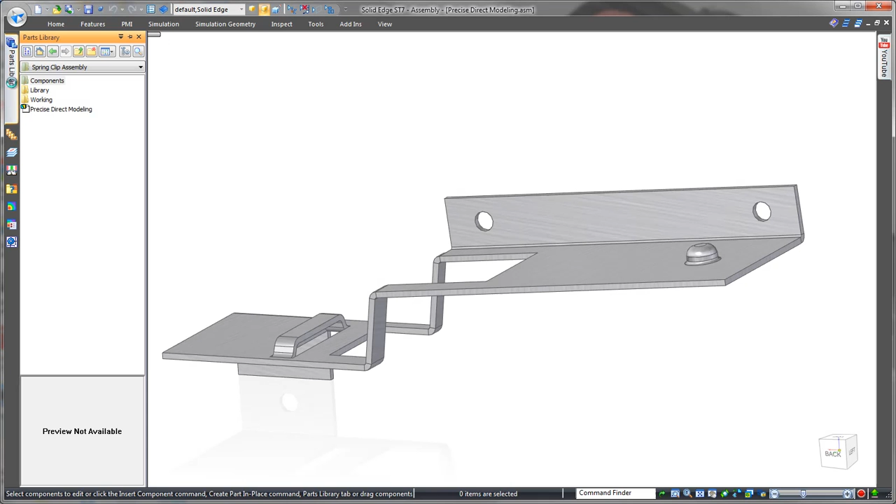Let's take a look at the precise parametric control on offer while we progress our spring clip concept. First, let's bring in our spring clip and assemble it with the parts it was intended for: the clip to the base, and the USB block it needs to hold.

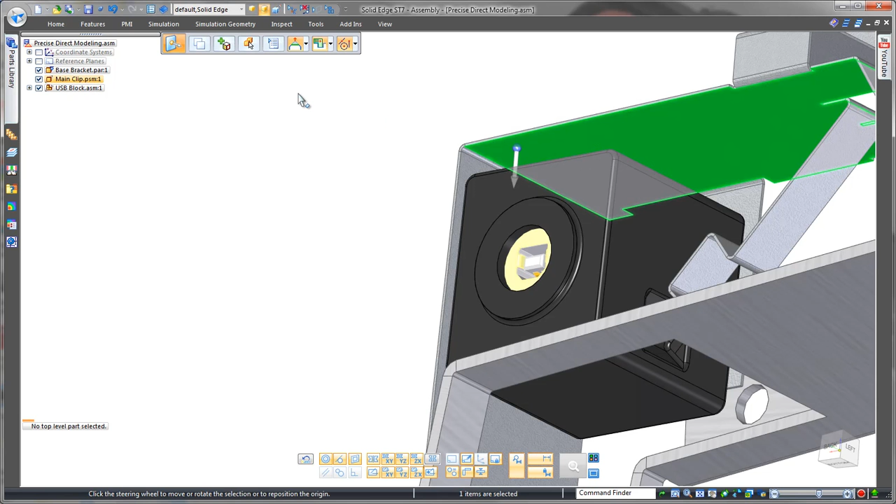The first precise change we need to make is to close up this gap between the top of the USB block and the spring clip. In most any other CAD system, you'd have to make this change at the 2D sketch level with sketch relations. In Solid Edge, we can simply relate faces in 3D instead.

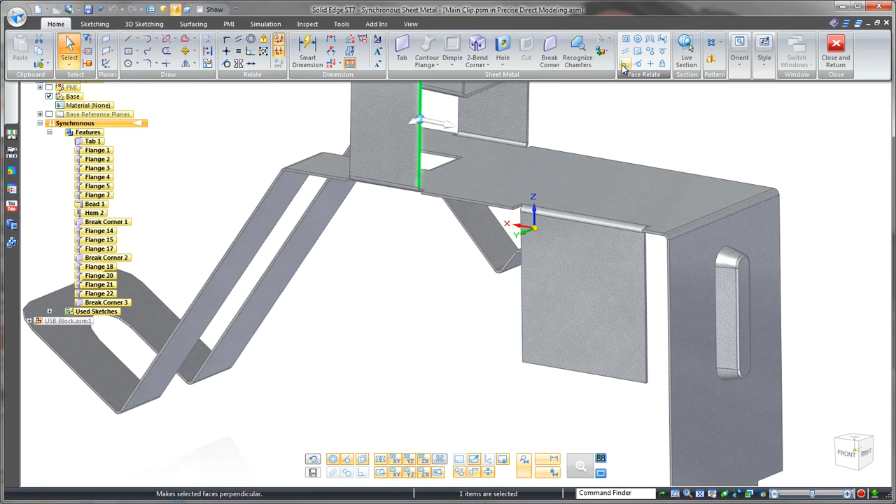Easy. Looking at the back, I notice the tabs on the top are not quite square with the top face. No problem, a couple more 3D relations will fix this. For the side faces of the tabs, making them perpendicular to the top, and for the top faces, making them perpendicular to the side. Notice how both tabs are being updated here. That's the intelligence of synchronous technology.

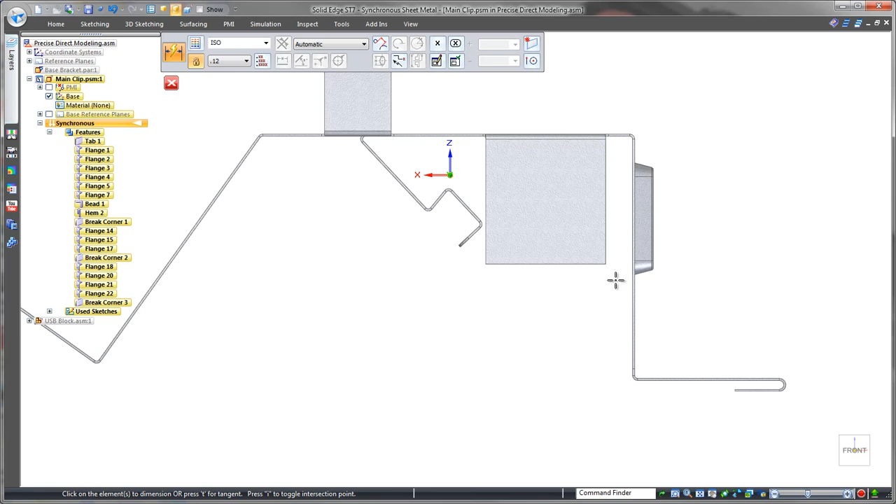Let's start detailing this model, and of course dimensions are key. Solid Edge has two main ways to dimension. The first is like most any other CAD system, in 2D when creating a sketch for a feature, but the second, which you see here, is unlike most any other CAD system, and much more intuitive. Just dimension the 3D model directly.

We can leave this floating so that we still have the flexibility for further changes, or lock it down to be precise. We'll lock this down and we'll add another one for the flange width.

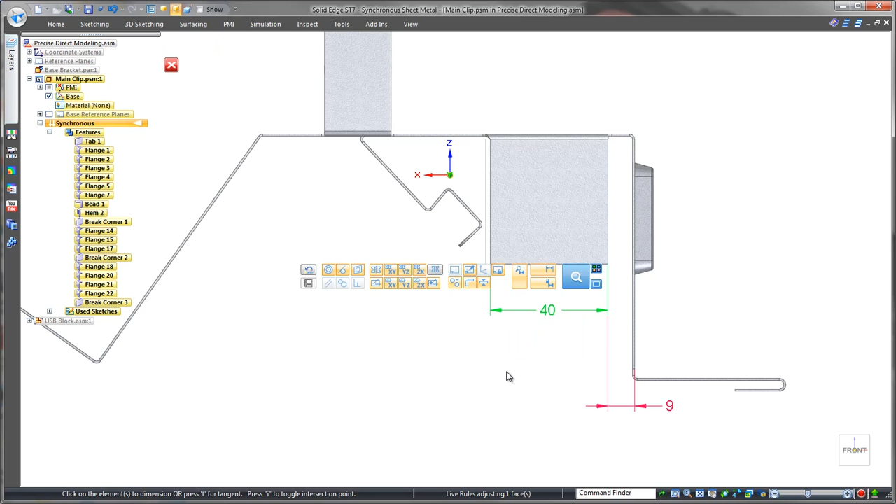We'll dimension these top tabs next, and look closely at the precise control that's provided. These green arrows allow us to control the direction of the change, which side moves and which side stays put, or even a symmetrical change if we wish.

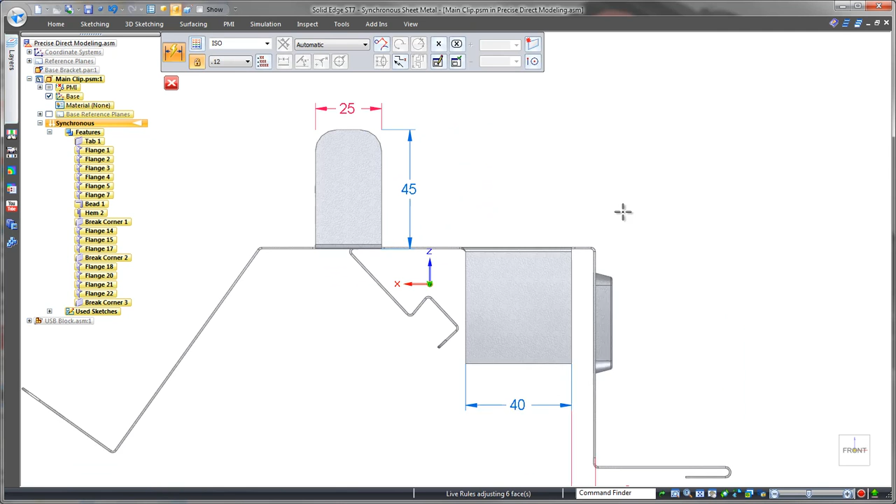We'll speed through adding the other required dimensions using the same technique, and for your information, the red dimensions are the ones we've locked down, and the blue ones are the ones we've left floating. Overall, notice how easy they are for someone else to understand. Great for reviews. Oh, and of course, we're not just talking linear dimensions, let's detail the angle here too.

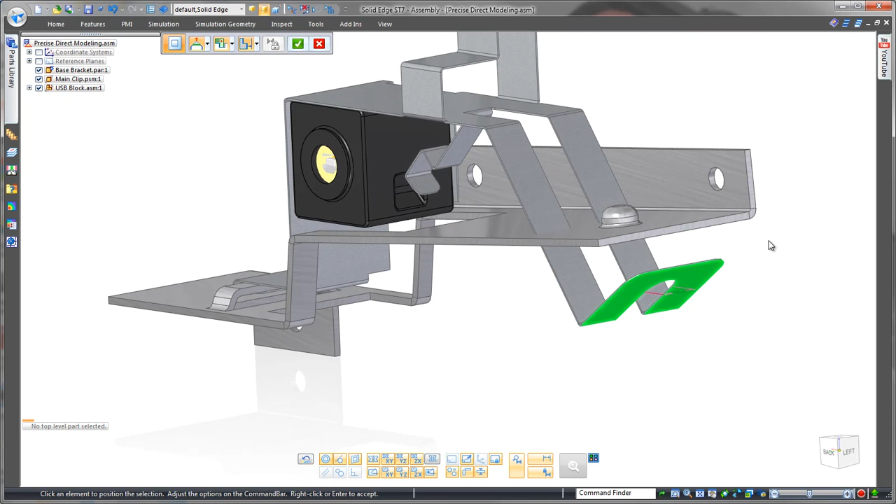We should finish working on the other end of the clip. Another 3D relation will do the trick to move and match the angle of this piece. And we can use what's called the steering wheel to drive a synchronous drag and snap into place here. And let's make sure that the whole thing is assembled centrally.

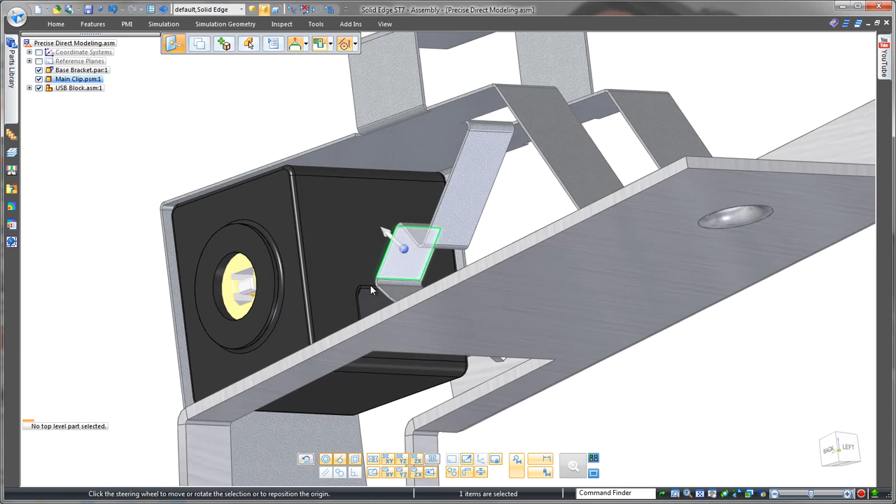Next up is the retaining clip that needs to slot inside the groove of the USB block. Once again, an easy face relation, or steering wheel, drag and snap can be used. Whatever's easier.

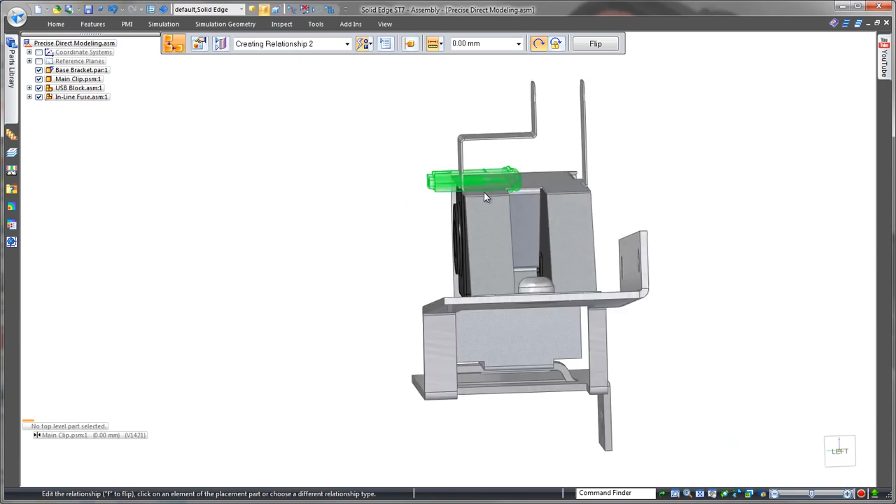Perfect. One last subassembly to bring in, an inline fuse. The purpose of the top tabs are to support this, so we need to make sure it'll fit tightly into place. So let's make some more precise direct edits.

Now I know the wire diameter is less than 3mm, so what we can do is drag the steering wheel to create a 3mm offset before dragging and snapping the tab itself. This leaves us with a 3mm gap, precisely how we want it. Let's drag this section in too, up against the fuse.

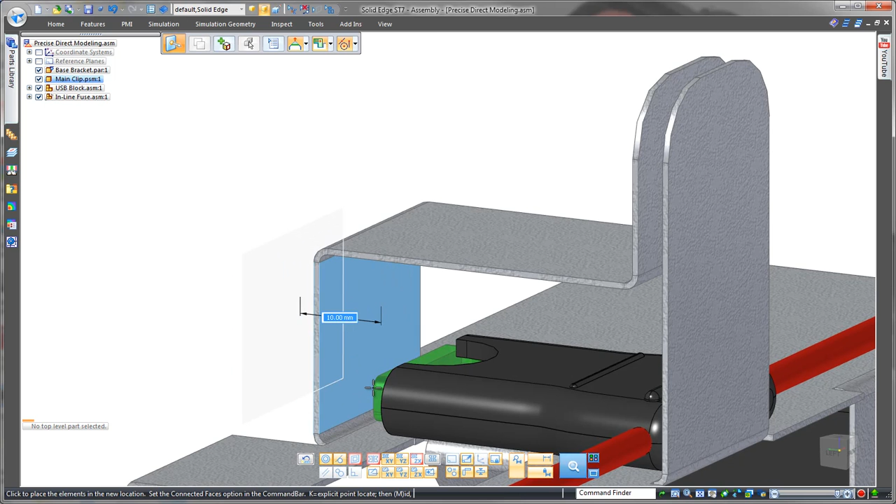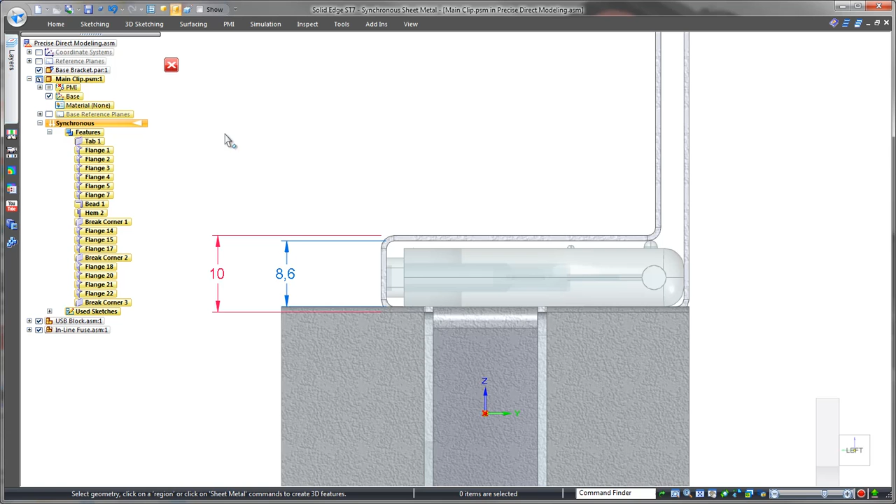Something worth noting is that for sheet metal dimensional control, we can design to either the outside or inside. It doesn't matter which dimension we change, be it inside or outside. Solid Edge will always take into consideration the material thickness.

Design complete, and of course it doesn't stop there. We can take this same all-in-one concept to final model into a manufacturing drawing. First of all, let's create a custom view of the assembly so that all aspects of the part can be seen. Let's have that shaded, and a few views of just the clip.

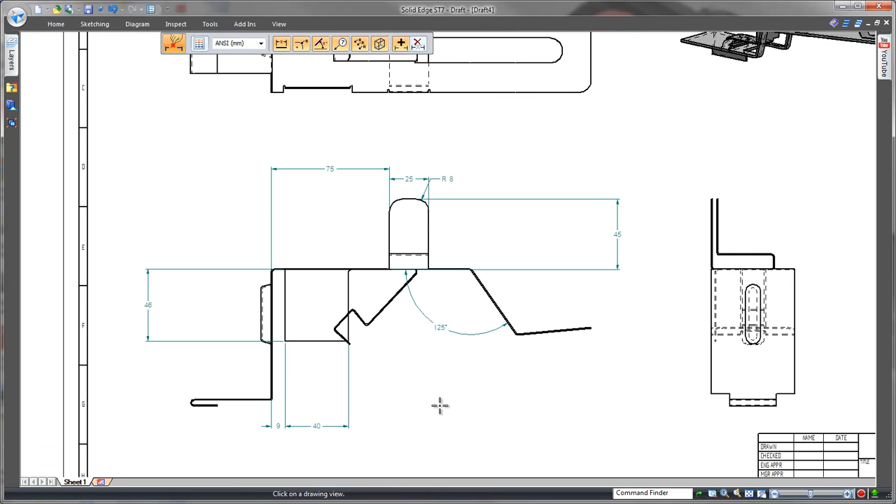And remember the 3D dimensions we added to the part? Look how quick we can bring those dimensions into this view.

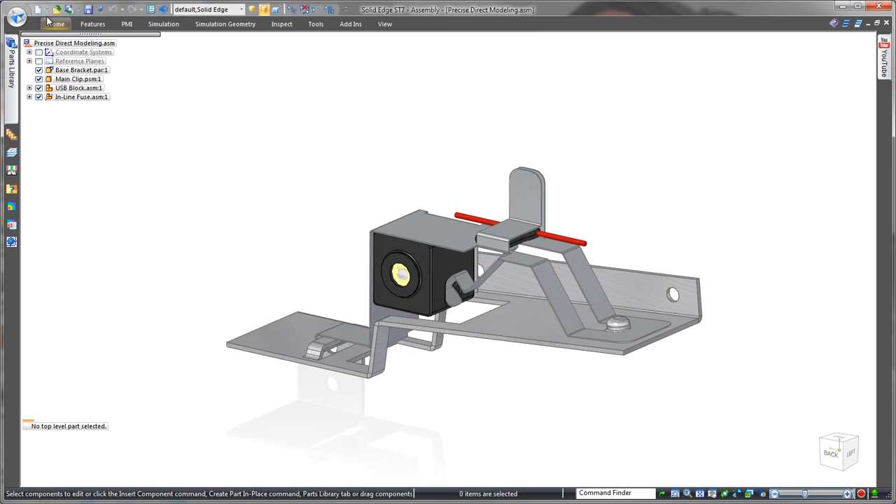So in summary, we've seen how Solid Edge with synchronous technology provides rapid direct modelling, but importantly with precise parametric control, relating faces, dimensioning, detailed drag and snaps, all in 3D, no sketch work in sight. Fast and easy, but most importantly accurate. Solid Edge, design better.